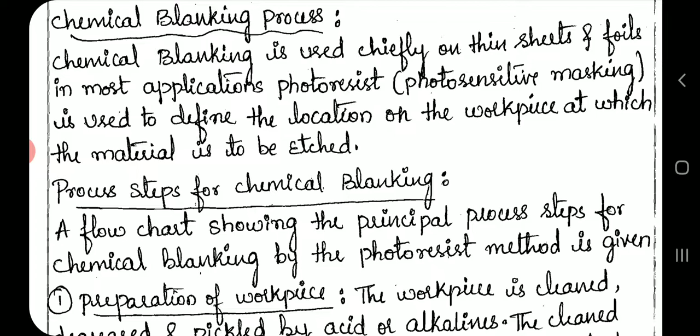A flowchart showing the principal process steps for chemical blanking by the photoresist method is given.

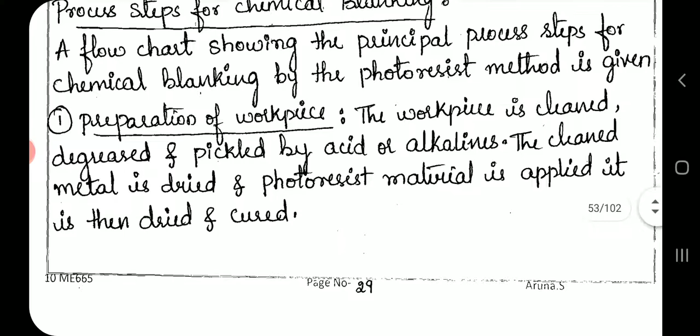Preparation of workpiece. The workpiece is cleaned, degreased, and pickled by acid or alkalines. The cleaned metal is dried and photoresist material is applied. It is then dried and cured.

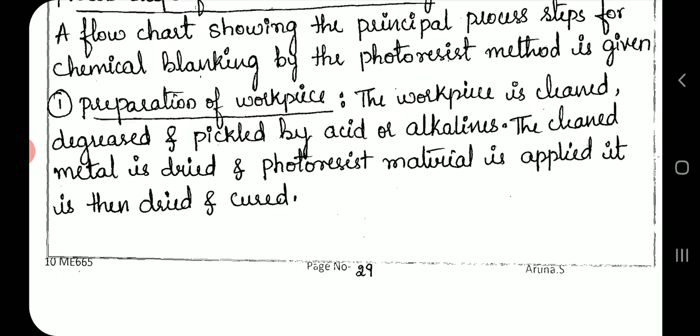Preparation of masters. Masters, the tools for chemical blanking, consist of the artwork and negatives used to produce the acid resistant image.

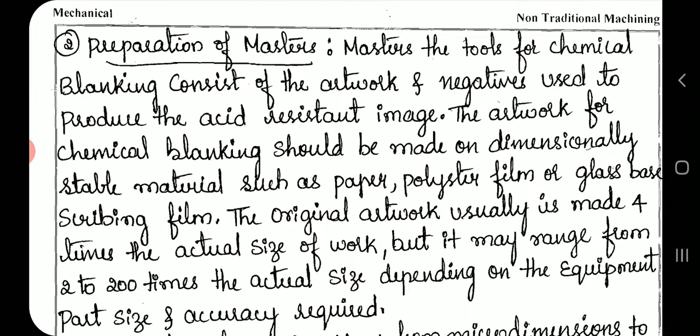The artwork for chemical blanking should be made on dimensionally stable material such as paper, polyester film, or glass based scribing film. The original artwork usually is made 4 times the actual size of work, but it may range from 2 to 200 times the actual size depending on the equipment, part size, and accuracy required. Individual part size can vary from micro dimensions to a maximum of 350 by 550 mm.

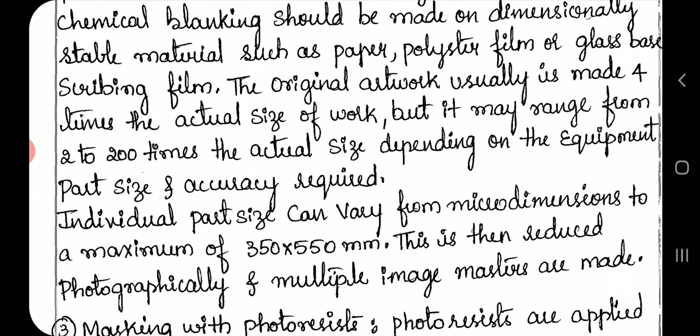This is then reduced photographically and multiple image masters are made.

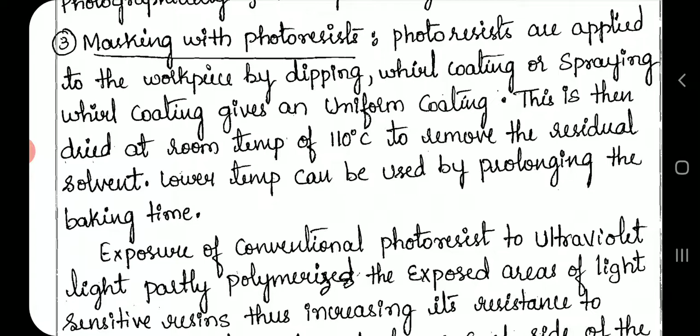Masking with photoresist. Photoresists are applied to the workpieces by dipping, whirl coating, or spraying. Whirl coating gives a uniform coating. This is then dried at room temperature or 110 degrees Celsius to remove the residual solvent. Lower temperature can be used by prolonging the baking time.

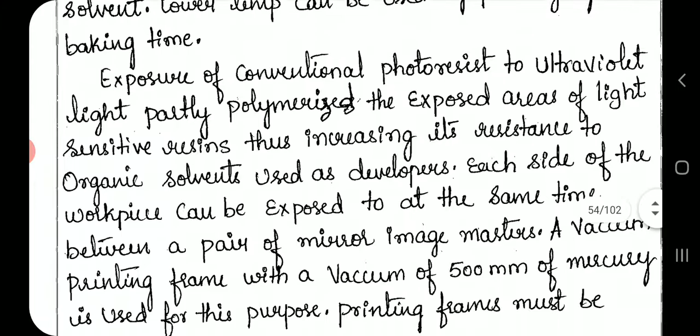Exposure of conventional photoresist to ultraviolet light partly polymerizes the exposed areas of light sensitive resins, thus increasing its resistance to organic solvents used as developers.

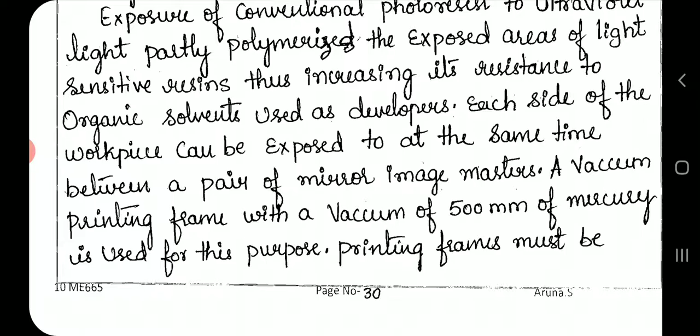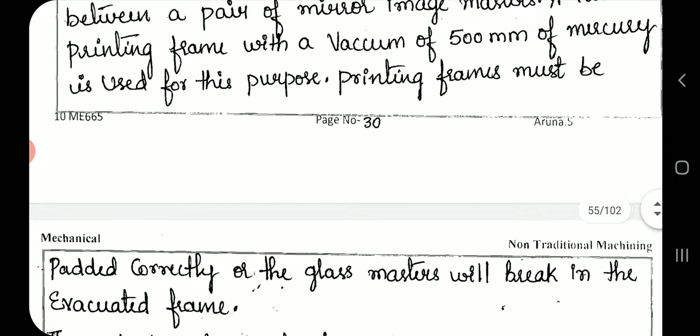Each side of the workpiece can be exposed at the same time between a pair of mirror image masters. A vacuum printing frame with a vacuum of 500 mm of mercury is used for this purpose. Printing frames must be padded correctly or the glass masters will break in the evacuated frame.

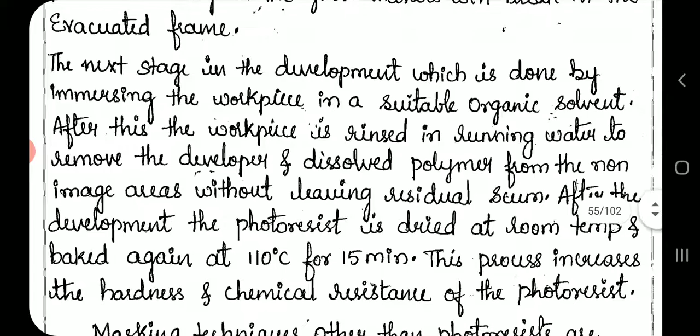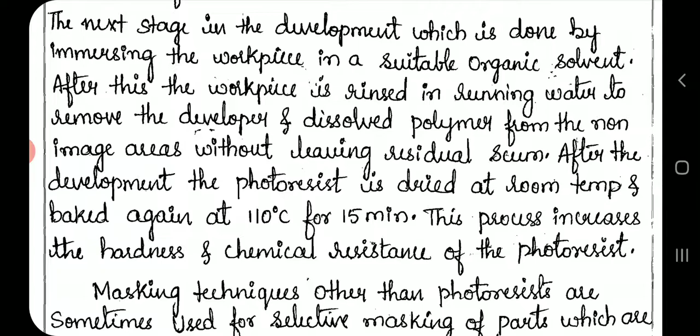The next stage is the development, which is done by immersing the workpiece in a suitable organic solvent. After this, the workpiece is rinsed in running water to remove the developer and dissolved polymer from the non-image areas without leaving residual scum. After the development, the photoresist is dried at room temperature and baked again at 110 degrees Celsius for 15 minutes. This process increases the hardness and chemical resistance of the photoresist.

Masking techniques other than photoresist are sometimes used for selective masking of parts which are large and do not require high dimensional accuracy. Maskant coatings can be applied directly to the work by screen or by offset printing.

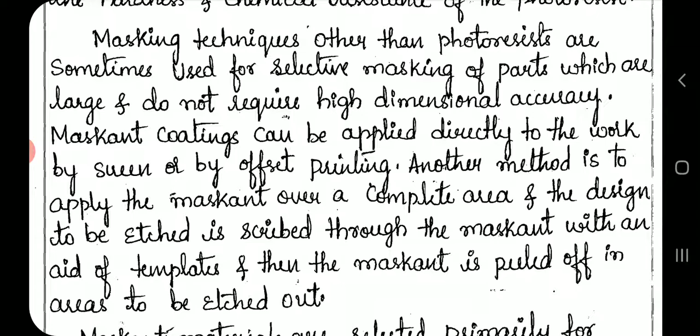Another method is to apply the maskant over a complete area and the design to be etched is scribed through the maskant with the aid of templates, and then the maskant is pulled off in areas to be etched out.

Masking materials are selected primarily for resistance of the cured maskant and the bonding property of the maskant to the workpiece under the action of the etchant.

Etching for blanking. Removal of material by etching is done by immersing the workpiece prepared by the above method in a bath containing etchants. The bath is agitated by air or mechanical means.

Designed spray etching machines are sometimes used if the component size is large. The cutting rates range from 0.01 to 0.05 mm per minute depending on the material and its metallurgical state.

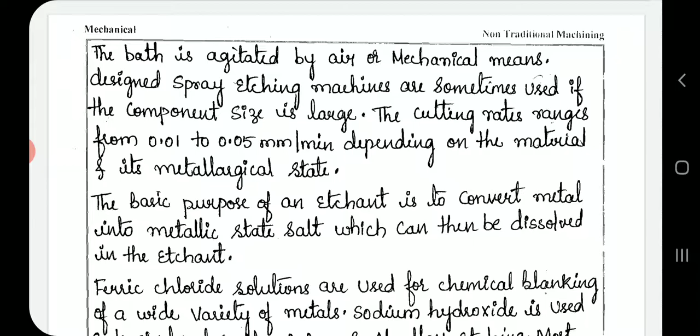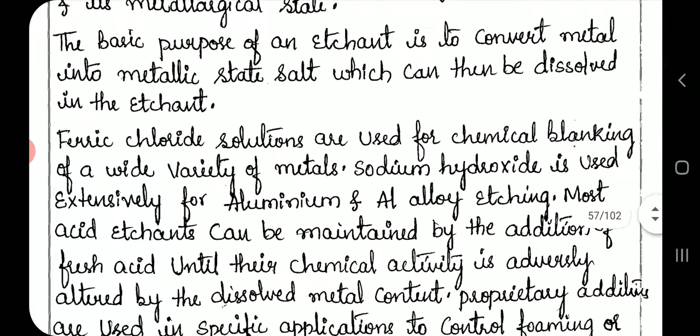The basic purpose of an etchant is to convert metal into a metallic state salt, which can then be dissolved in the etchant. Ferric chloride solutions are used for chemical blanking of a wide variety of metals. Sodium hydroxide is used extensively for aluminum and aluminum alloy etching.

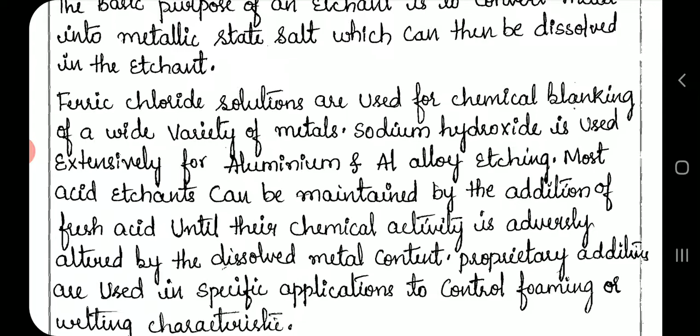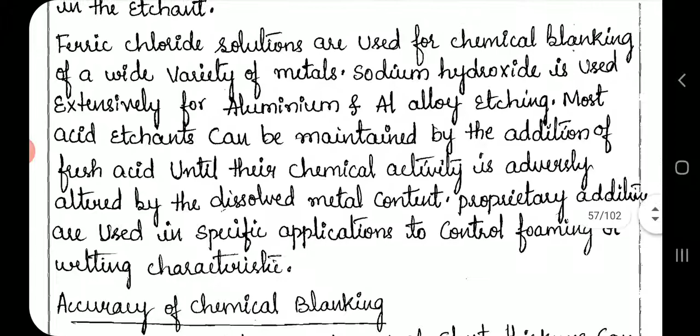Most acid etchants can be maintained by the addition of fresh acid until their chemical activity is adversely altered by the dissolved metal content. Proprietary additives are used in specific applications to control foaming or wetting characteristics.